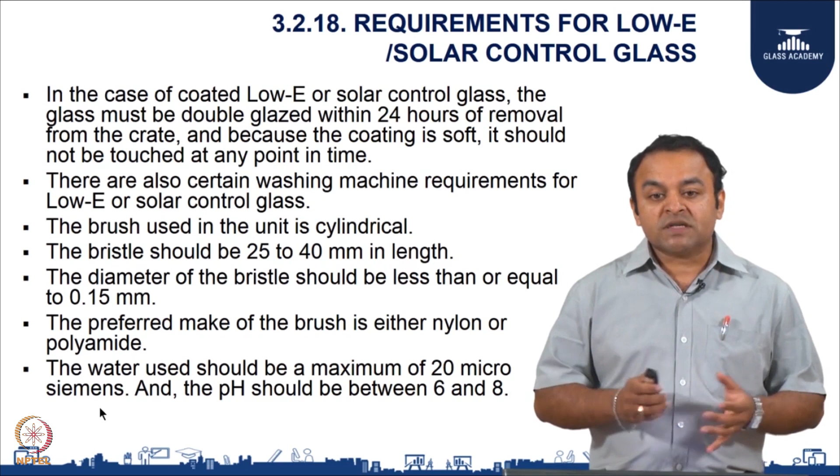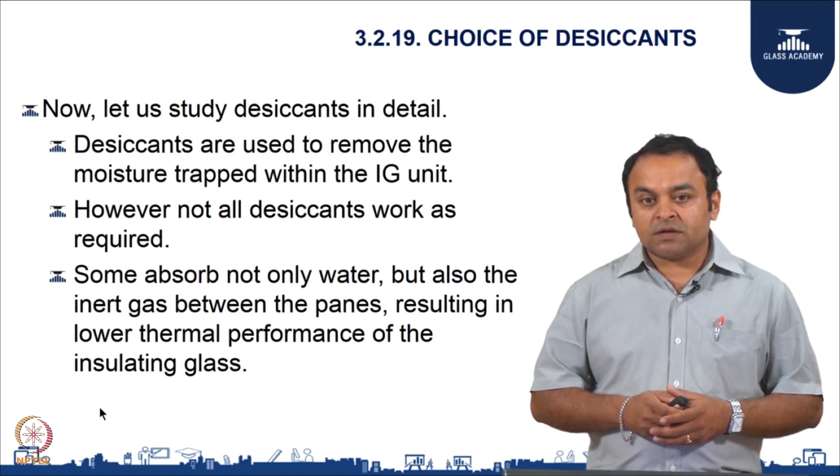Now let us come to the choice of desiccants. Normally the desiccant which is used is 3 angstrom. Some absorb not only the water but also the inert gas between the panes, resulting in lower thermal performance of the insulating glass. The desiccant should have a property to absorb water as well as hydrocarbons. It should not absorb the inert gas and other thermal performance gases. It should not contain any pre-absorbed nitrogen.

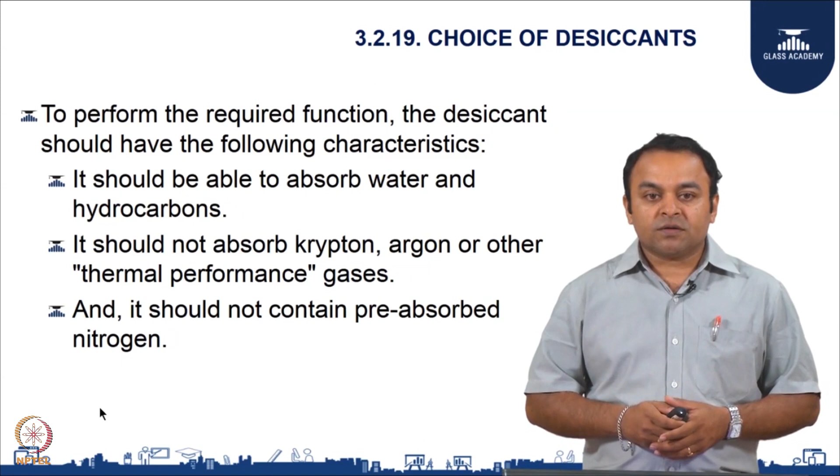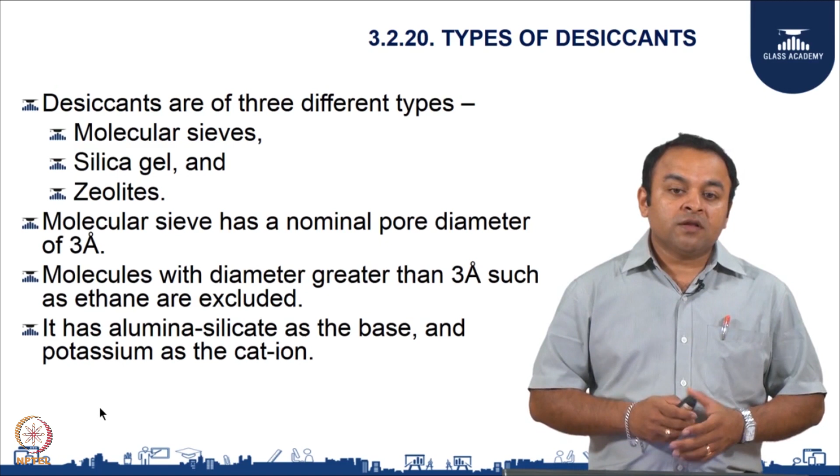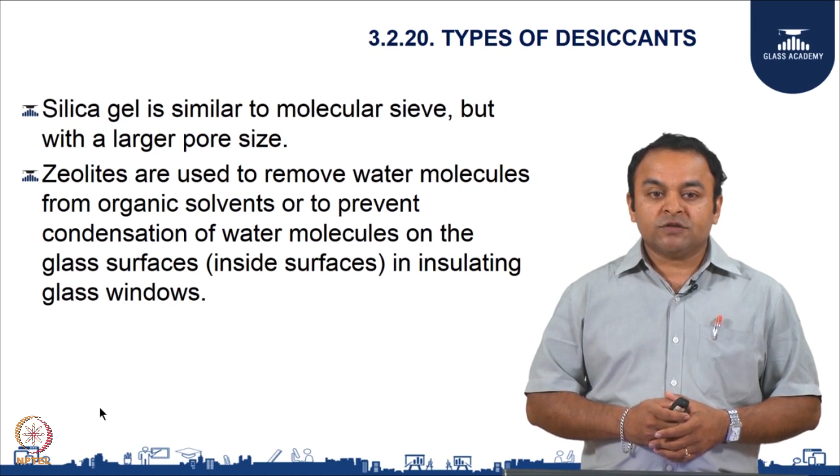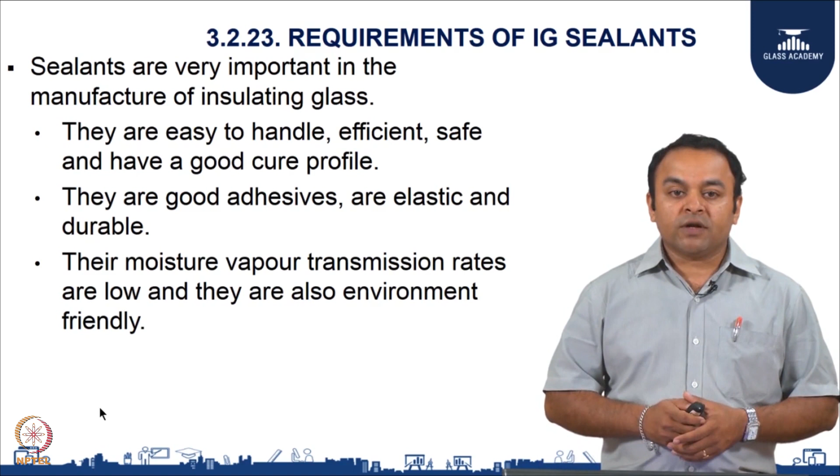Now comes the requirement of the IGU sealants. Sealants are very important in the manufacturing of IGU. They are very easy to handle, efficient, safe and have a good cure profile. They are good adhesives and are elastic and durable. The moisture vapor transmission rates are low and they are environmentally friendly. You have a primary sealant as well as a secondary sealant.

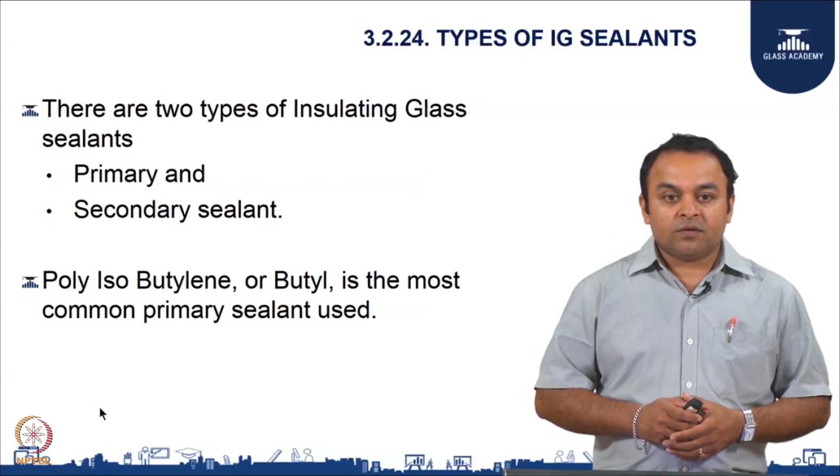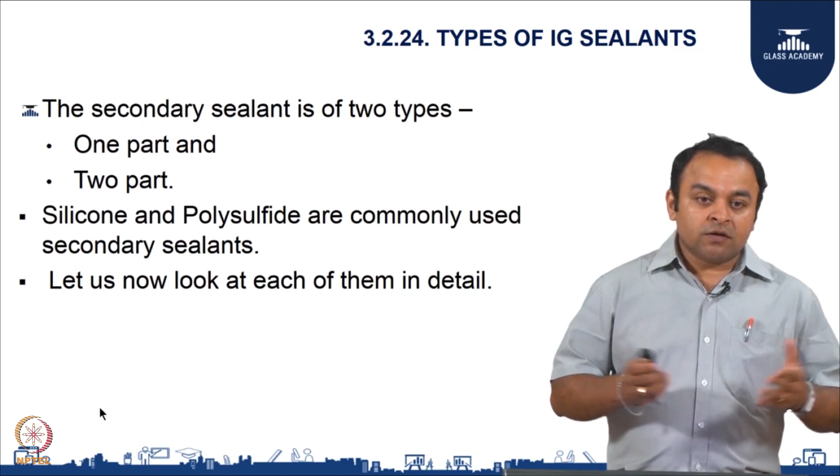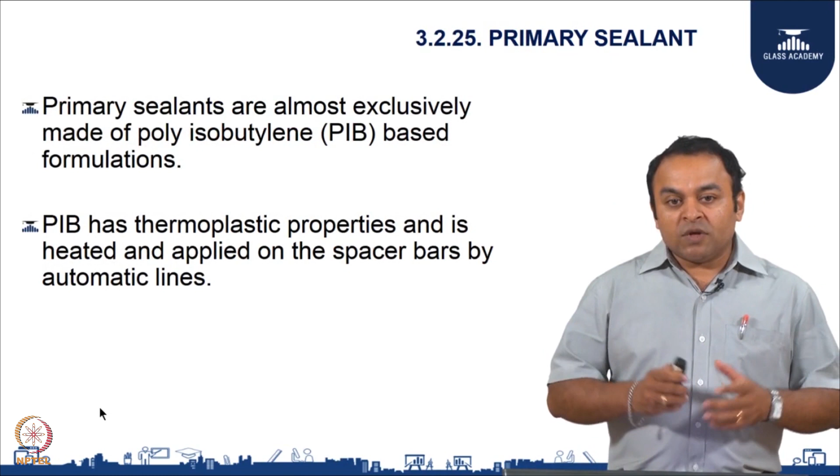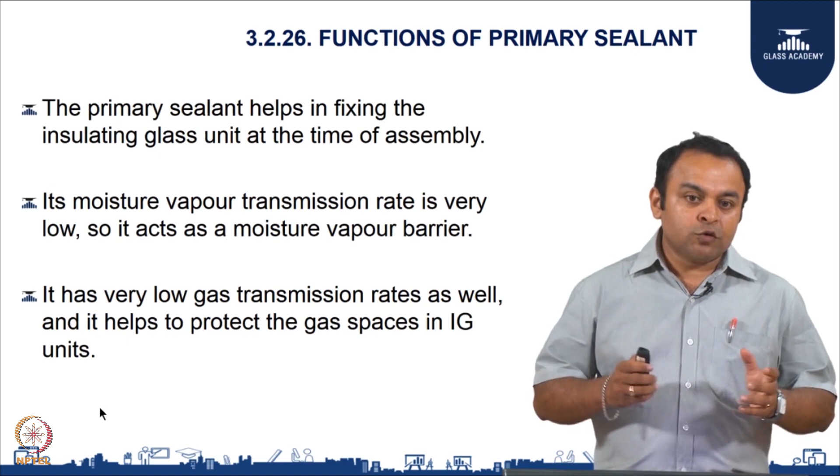Primary sealants are almost exclusively made of polyisobutylene. They have thermoplastic properties and are heated and applied on the spacer bars by automatic lines. The primary sealant helps in fixing the insulating glass unit at the time of assembly. Its moisture vapor transmission rate is very low, so it acts as a moisture vapor barrier. It has very low gas transmission rates as well, and it helps to protect the gas spaces in the IG unit.

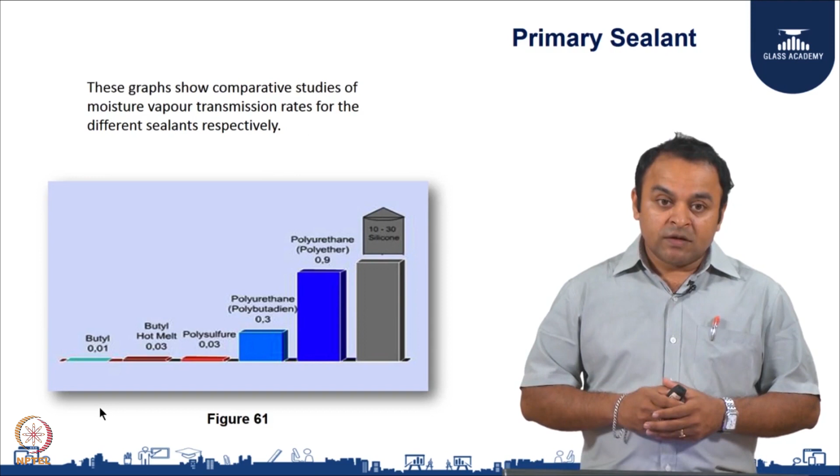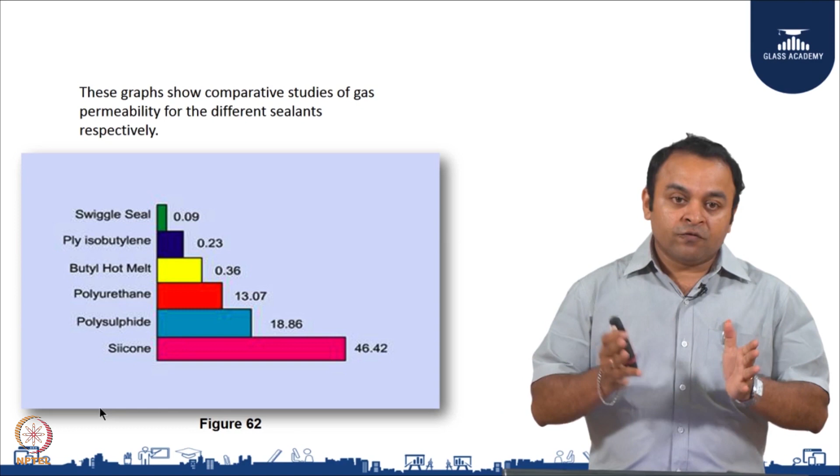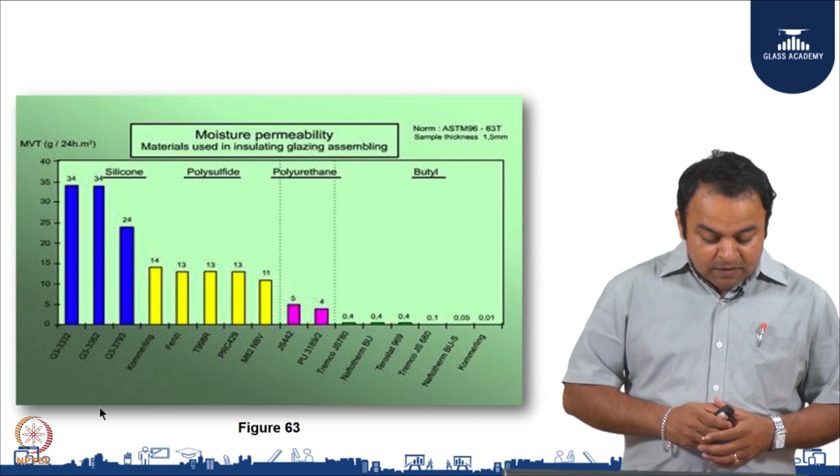Okay, if you see the graph, silicone has the maximum moisture vapor transmission rate, while butyl has the least from the list. This compares the study made for gas permeability for different types of sealants. You have the butyls, you have the polysulfide, you have the silicones. Silicone is the worst for gas retention, and polysulfide has much better properties than silicone when you have the gas filled inside the DGU. And this graph shows different varieties of sealant as well as the polysulfides and polyurethanes. You can see the moisture permeability from this graph.

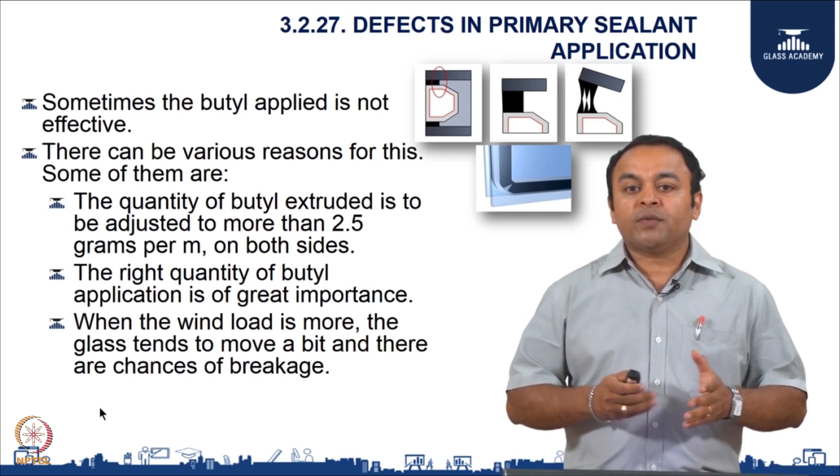Now let us come to the defects of an IGU. The quantity of butyl extruded is to be adjusted to be more than 2.5 grams per meter on both the sides of the aluminum spacer. The right quantity of butyl application is of great importance. When the wind load is more, the glass tends to move a bit and there are chances of breakage. So that is taken care of by the primary sealant. If the correct quantity of butyl has been used, it absorbs the glass movement and delays potential breakage.

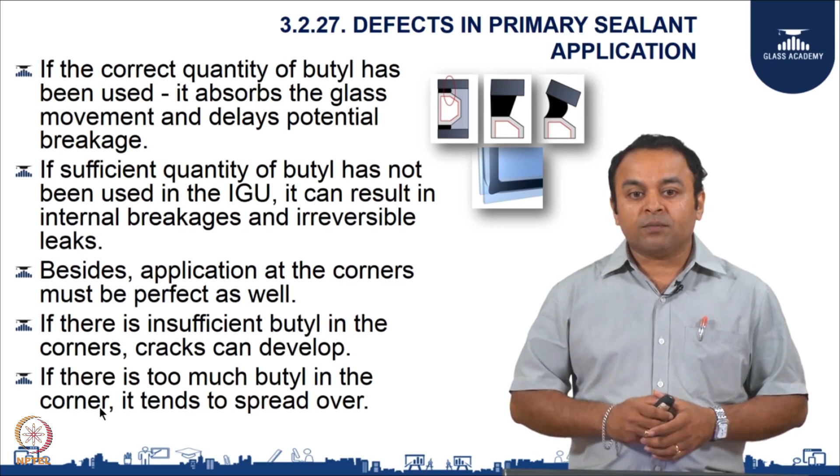If sufficient quantity of butyl has not been used in the IGU, it can result in internal breakage and irreversible leaks. Besides, application at the corners must be perfect as well. If there is insufficient butyl in the corners, cracks can develop, and if there is too much butyl in the corner, it tends to spread over.

Now let us see the secondary sealant defects. Let us now look at the functions of secondary sealant. Secondary sealant is the structural bond of the glass panes and the spacers. It protects the gas-filled spaces from the influence of moisture, vapor penetration, chemical attack, cleaning fluids and glazing products, and the liquid penetration due to rain or condensation. It has low MVTR and gas diffusion rates.